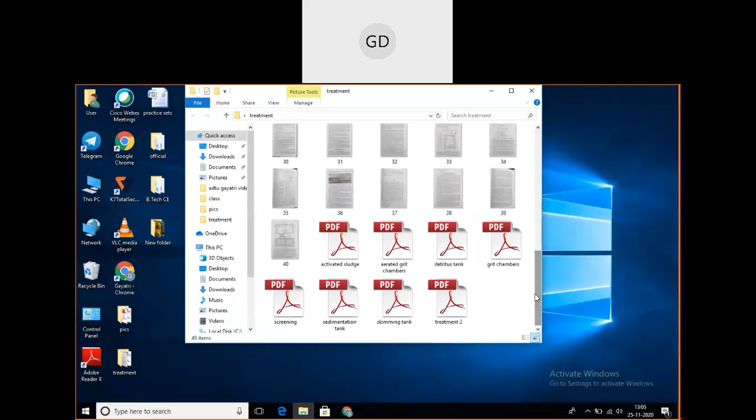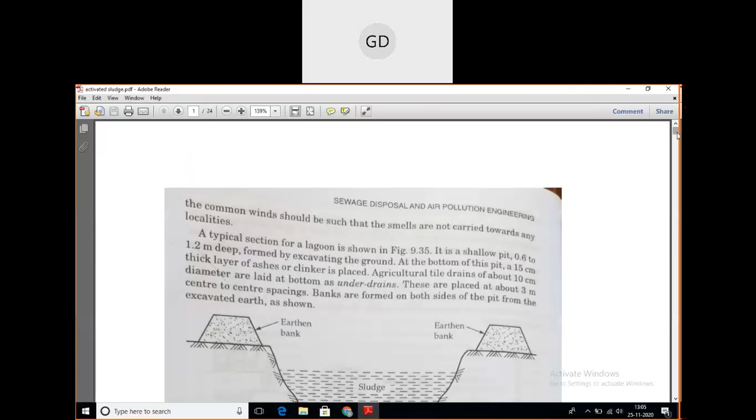Okay, so last class we have done about the activated sludge process. Yes, we have completed the activated sludge process. We have done the advantages and disadvantages of the activated sludge plant also, I guess. Yes, we have done this one also.

Okay, so today, with today's class, we will be finishing up your treatment plant. The whole treatment chapter we will be ending up today. So before that, I would like to show you one video, and after that we will be doing two numericals related to your trickling filter. Trickling filter plant, we will do two numericals.

So first, that day we had discussed about the activated sludge process and the trickling filter process differences, and the advantages and disadvantages of those things. Today, related to that, I would like to show you one video so that it would be more clear to you, both the trickling filter and activated sludge process together as a whole process, which one is better and what are the advantages of the trickling filter process. So that video I would like to show you today. After that we will be solving two numericals.

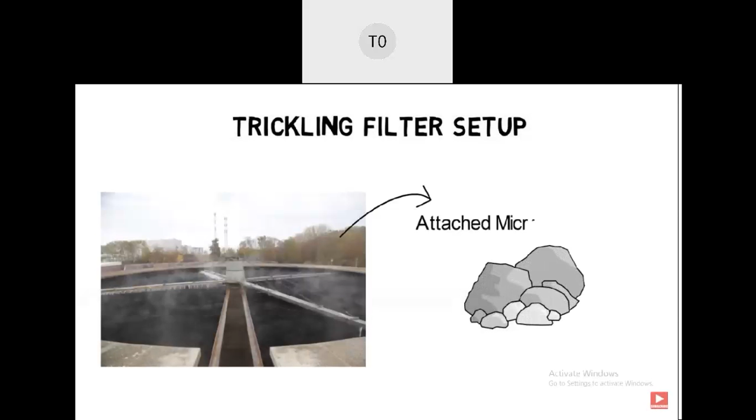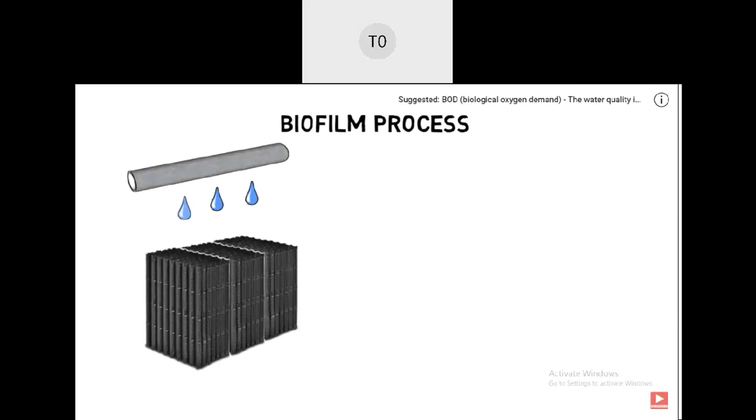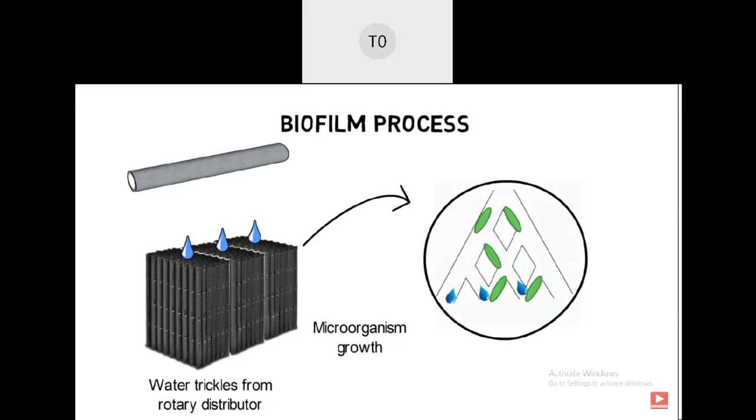Trickling filters, also known as biofilters, are normally a fixed-bed biological reactor operating in aerobic conditions. In the filter, microorganisms are attached to the inert packing material, which was composed of rocks or gravel in the past and is nowadays a wide range of plastic film media. Film media support is placed on the tank bottom, with wide openings that allow a good air and water mixing. Microorganisms on the film media surface work on the removal of soluble organic matter from the settled sewage that is sprayed over the bed surface through a rotary distributor and is treated as it trickles through the fixed bed, navigating through layers of microorganisms. The layers remove pollutants by both absorption and species removal like nitrite, nitrate, and others. Removal rates can reach up to 95%.

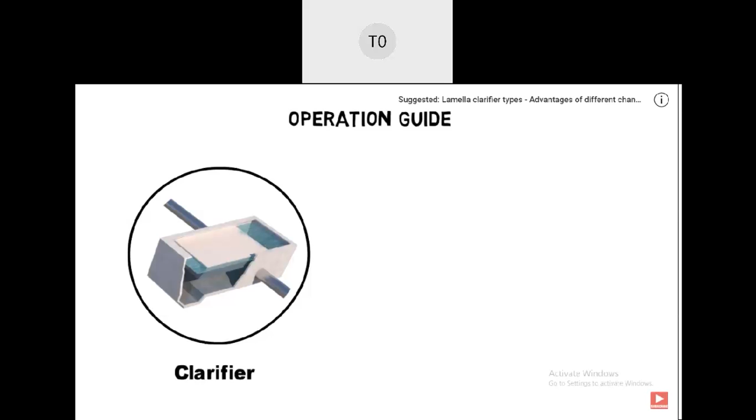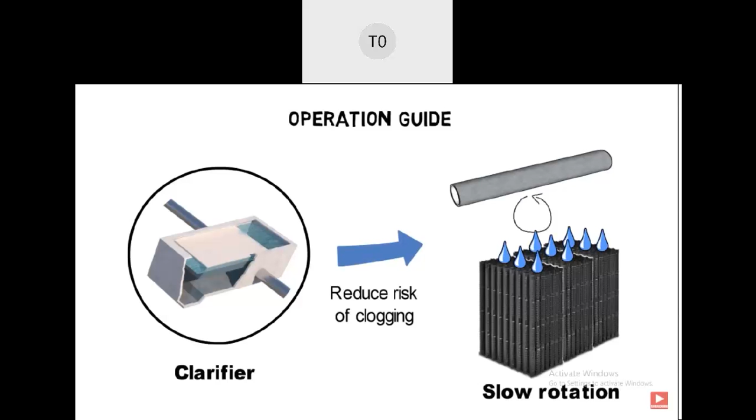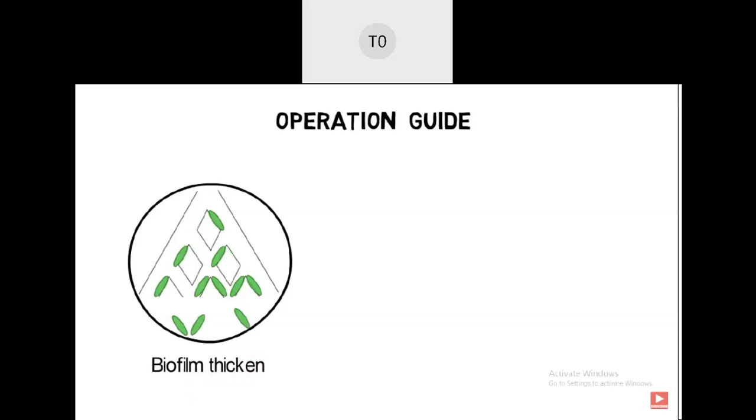In order to avoid clogging, a primary sedimentation process precedes the trickling filter. Also, the design of the rotary distributor has a high impact on the risk of clogging. The rotation velocity of the rotary distributor can be changed by either adjusting the incoming water flow or by using an electrical motor. The smaller the rotation velocity, the higher the water volume per square foot, and the bigger the flushing effect. In time, the biofilm thickens and detaches into the liquid flow, forming the secondary sludge. Trickling filters are normally followed by clarifier or sedimentation tanks. The sludge collected is treated for reuse or prior to disposal.

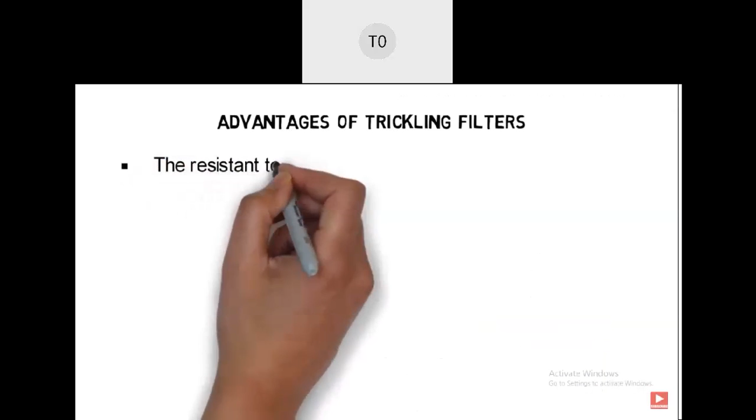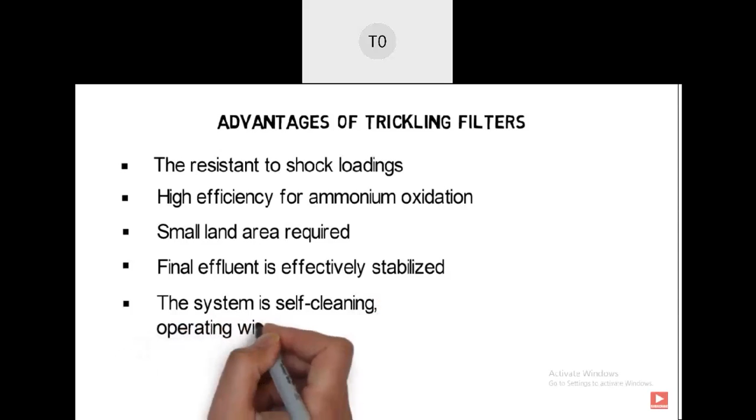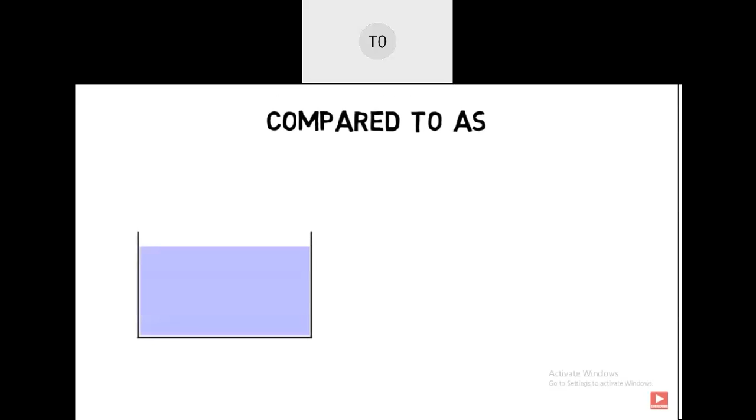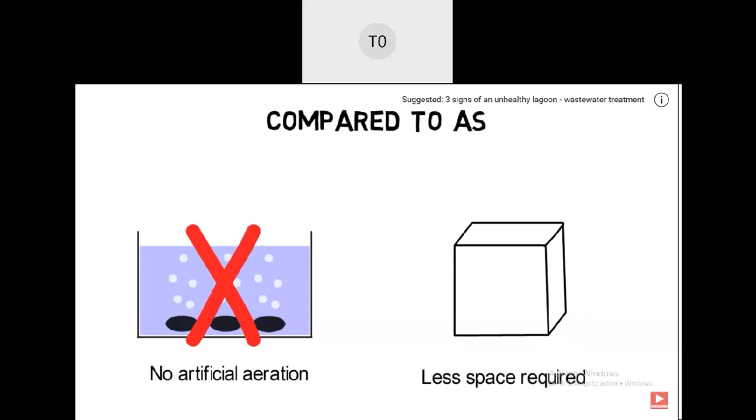Among the main advantages of this system, it is important to highlight resistance to shock loadings, high efficiency for ammonium oxidation, small land area required, and the final effluent is effectively stabilized. The system is self-cleaning, operating with low maintenance requirements. Operational costs are low since wear and tear are reduced due to limited use of mechanical equipment. Furthermore, compared with similar methods such as activated sludge, trickling filters are significantly more cost-effective as they don't require artificial aeration and have a smaller demand for operational space, resulting in cost reduction. Thanks for watching, and if you like our 3-minute tutorials, please subscribe and don't forget to give a thumbs up.

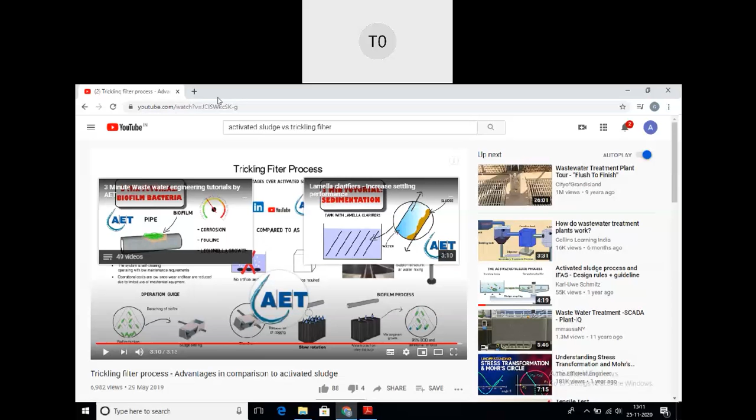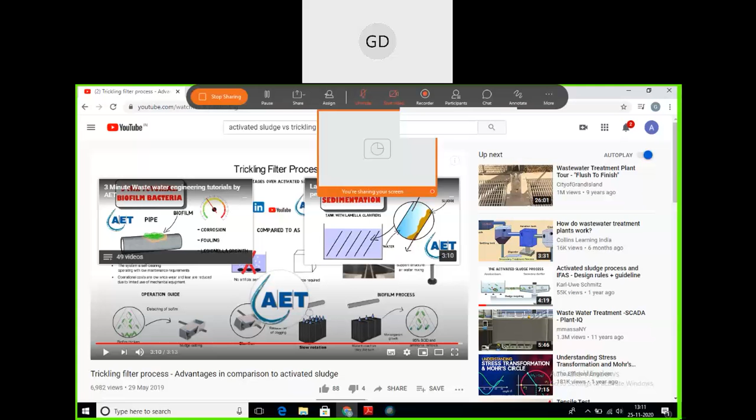Okay, so you have seen the advantages and disadvantages. It's clearly explained in the video also. Now coming back, let us solve two numericals related to your trickling filter.

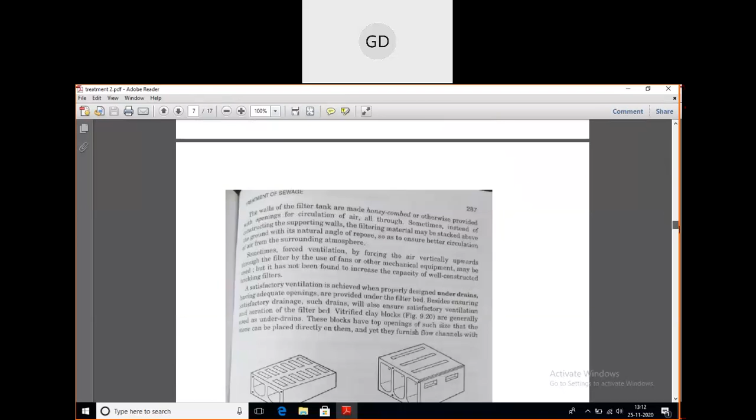Okay, so before solving the numerical, first let us go through the design considerations of the trickling filter. Let me change the color. So it's written like the design of the trickling filter primarily involves the design of the diameter of the circular filter tank and its depth. So if in the question it's given to design the trickling filter, it involves the design of the diameter of the circular filter tank and its depth.

So the design of the rotary distributors and under drainage system is also involved in the filter design. You have seen that trickling filter. I have shown you the video also, and I have shown you the cross-sectional diagram also. So you need to design the rotary distributors also and the under drainage system also. But that makes the numerical a bit long. The design of trickling filter numerical is a bit long.

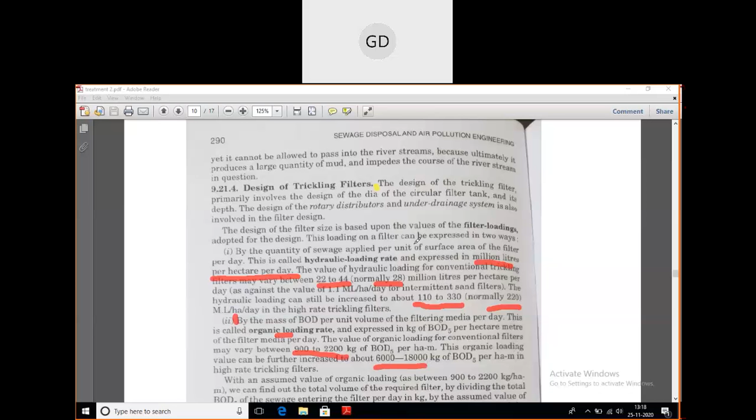And what about the high rate trickling filter? It is between 6000 to 18,000 kg of BOD5 per hectare meter in high rate trickling filters. For solving the numericals, you have to remember the loading rates - for conventional and high rate trickling filters, what is the variation of the hydraulic loading rate, and also the organic loading rate you have to remember.

So next, with an assumed value of organic loading between 900 to 2200 kg per hectare meter, we can find out the total volume of the required filter. So after you assume the value of the organic loading, you can find out the total volume of the required filter, whatever the filter size you are going to find out. How will you find out? By dividing the total BOD5 of the sewage entering the filter by the assumed value of the organic loading.

So it is like BOD5 divided by your organic loading. The organic loading will decide the volume of the filter. So why are you finding the organic loading? So that you can find out the volume of the filter.

The hydraulic loading, on the other hand, gives us the area of the filter. Why are we finding the hydraulic loading? Because we need to find out the area of the filter. And the organic loading, we find because we need to find out the volume of the filter. Remember this difference? Hydraulic loading is to find out the area of the filter, and organic loading is to find out the volume of the filter. Clear?

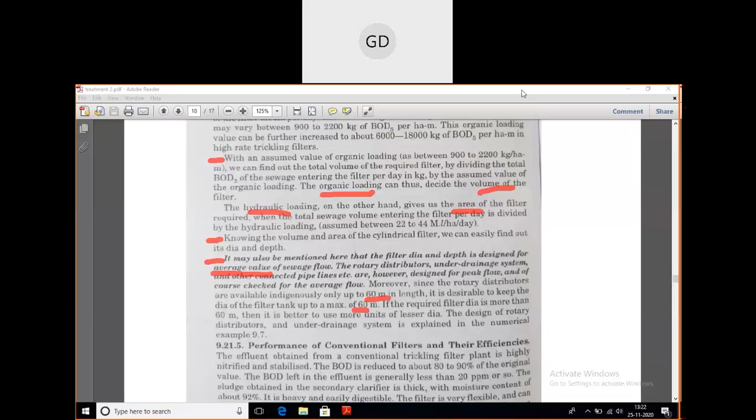Now, the rotary distributors are available indigenously only up to 60 meters in length, so it is desirable to keep the diameter of the filter tank up to a maximum of 60 meters. So you need to keep the diameter to a maximum of what? 60 meters.

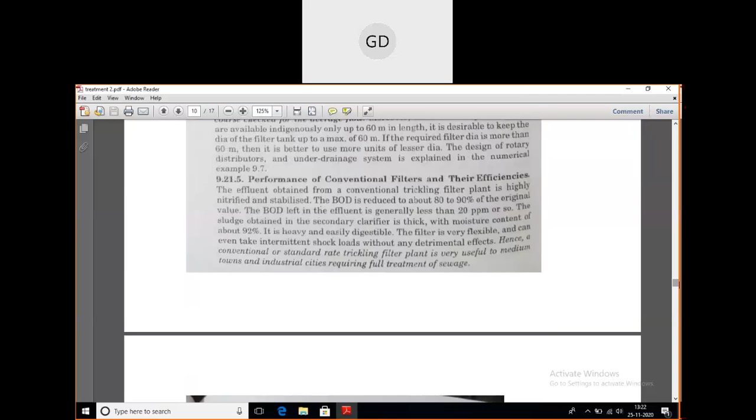With all this, you also have to find out the efficiency of the filter. So how will you find out the efficiency? This is the formula. Efficiency is always in percentage, as everyone knows.

So the formula is eta equals 100 divided by 1 plus 0.0044 times the square root of U. Eta is your efficiency of the filter and its secondary clarifier, in terms of percentage of applied BOD removed. So it is simply efficiency. And what is U? It is your organic loading in kg per hectare meter per day applied to the filter. So U is your organic loading.

You will get the value of organic loading in the first step. After that, you just put in the organic loading value and you can find out the efficiency of your trickling filter.

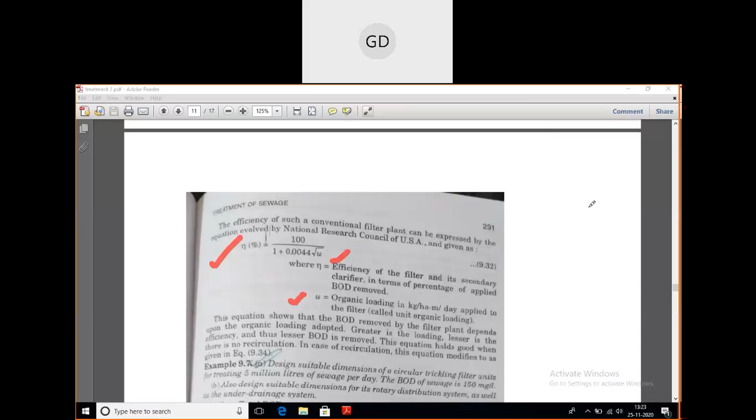Clear? So now we will design one numerical problem for a trickling filter. The question is: design suitable dimensions of a circular trickling filter unit for treating 5 million liters of sewage per day. The BOD of sewage is 150 milligrams per liter. So one part of the question is to design the circular trickling filter.

Okay, to design a circular trickling filter, it is given that it is used for treating 5 million liters of sewage per day, and the BOD of the sewage is also given as 150 milligram per liter. So the other part of the question is to design the suitable dimensions for its rotary distribution system as well as the under drainage system.

Okay, so there is a two-part question. So here in the exam, if only the first part comes, no need to design the second part like the rotary distribution system. And if the second part comes, then you have to design the whole problem from the dimensions to the rotary distribution system. So let us see the solution, how it is solved.

So first, since it is given that 5 million liters of sewage is treated per day and the BOD of the sewage is also given as 150 milligram per liter, you find out the total BOD present in the sewage to be treated per day. So you just multiply both values, and you will get the total BOD that is present in the sewage to be treated per day.

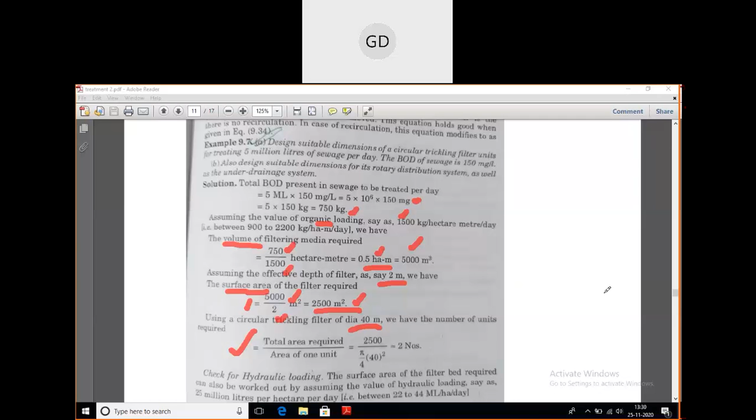Now you have to check for the hydraulic loading. We have done the organic loading part, so now you have to find out the hydraulic loading. The surface area of the filter bed required can also be worked out by assuming the hydraulic loading. We have studied before that hydraulic loading should be between 22 to 44 million liters per hectare per day. So you assume a medium value, which is normally taken to be 25 million liters. We find out the hydraulic loading to find out the area of the filter.

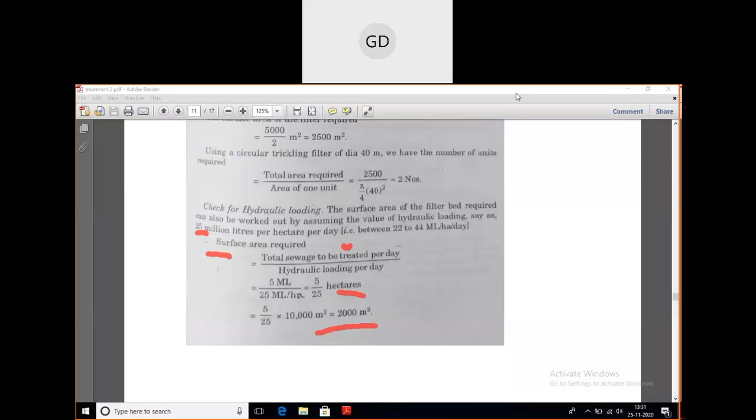So what is the formula to find out the surface area? It is total sewage to be treated per day divided by hydraulic loading per day. Total sewage given in the question is 5 million liters, and hydraulic loading is 25 million liters per hectare. So it's 5 divided by 25. Since it's in hectares, they have converted it to meter square. 1 hectare is equal to 10,000 meters square, so you get it to be 2,000 meters square.

So the hydraulic loading part is done. Now you can write that the surface area chosen is 2,500 meters square, which is greater than 2,000 square meter and hence safe. The surface area should be greater than 2,000, not below it. Since here you got 2,500 meters square, which is greater than 2,000, the design is safe. Finally, you got two units, each with 40-meter diameter and 2-meter effective depth. If you provide a freeboard of 0.6, the total overall depth comes to 2.6 meters. You can also provide one extra third unit as a standby to use later. So this is the first part of the numerical solved.

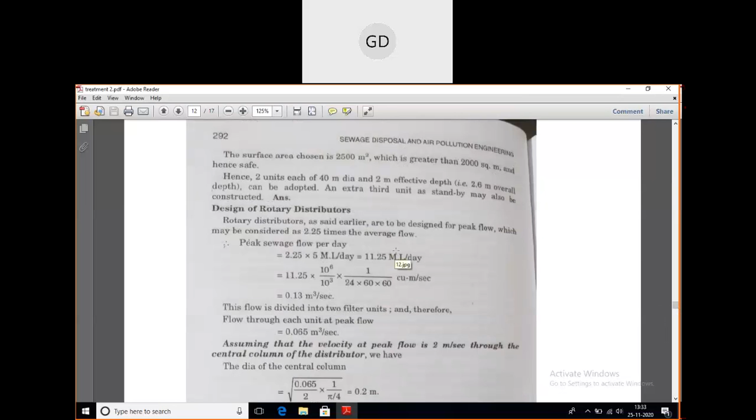Next is the design of rotary distributors. Rotary distributors are designed for the peak flow, as we have just studied. Peak flow is considered to be 2.25 times the average flow. What is the average flow? It is 5 million liters per day. Multiplying, you get 11.25 million liters per day, which when converted to cubic meters per second gives you 0.13 meter cube per second.

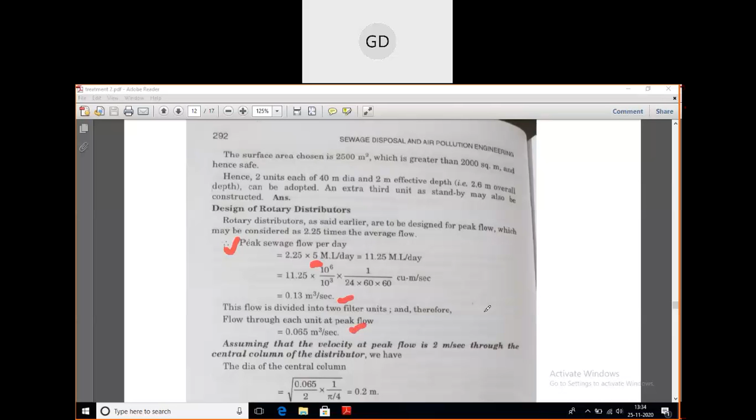Now the flow is divided into two filter units, so you have to divide this peak flow by 2 to find out the flow through each unit. So 0.13 divided by 2 gives you 0.065 meter cube per second. Okay, next, it's quite a long numerical.

Okay, so next you have to assume the velocity at peak flow. Why assume the velocity? Because you need to find out the diameter of the central column of the rotary distributor.

What is the velocity at peak flow? It is taken here to be 2 meter per second, coming through the central column of the distributor. So now we have to find out the diameter of the central column.

So how will we find out? It is like root over 0.065 divided by 2 into 1 by pi by 4. This is the formula for diameter: 0.065 divided by 2 into 1 by pi by 4.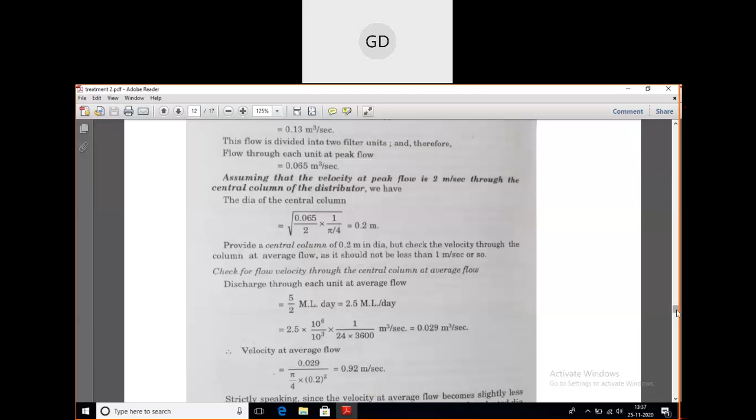So slightly less diameter, if we assume like 0.2 we assumed before, now if we assume 0.19, we have to again find out the velocity. Using 0.19 diameter, you will get it to be 1.023 meter per second, which is slightly greater than 1 meter per second, and hence this is permissible and safe.

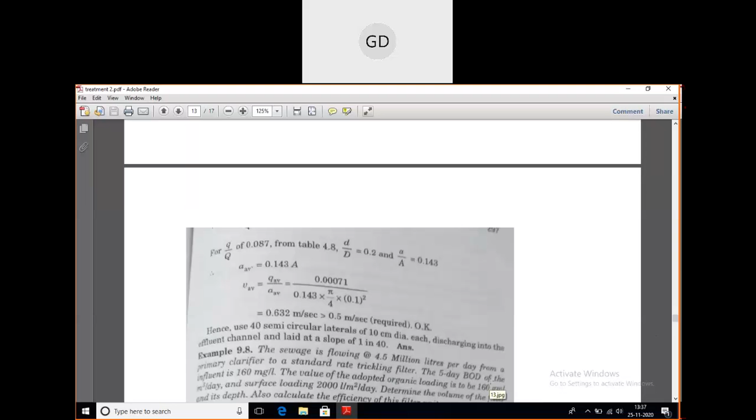Next, we have one table, one chart, and there is the ratio between small d by capital D, small a by capital A. Those things were written there.

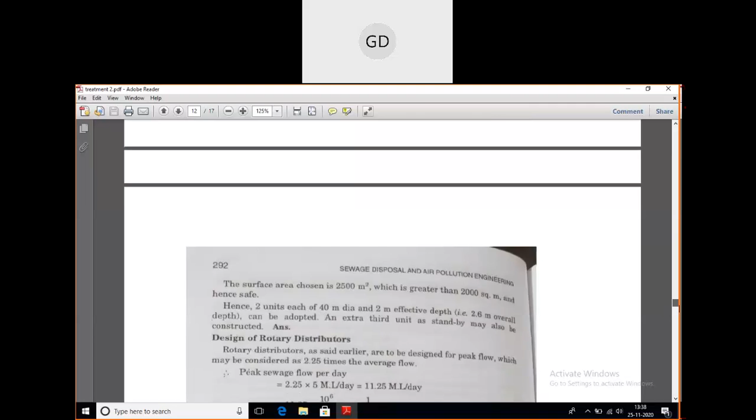So this numerical is a bit long and a little bit confusing. You have to remember the assuming things, then you can automatically solve the numerical. Okay, let us end today's class here.